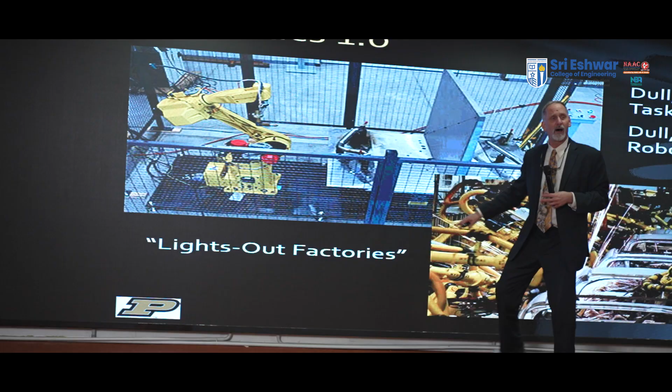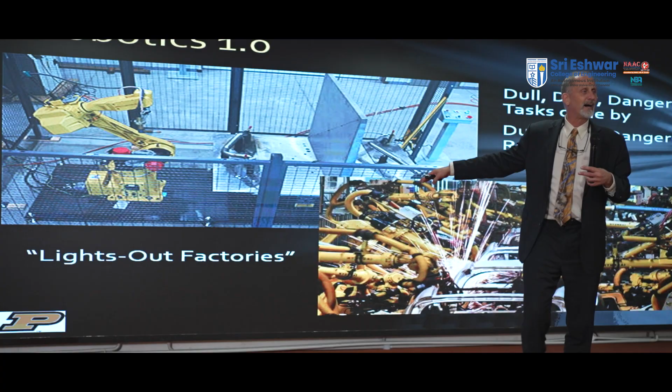My definition kind of captures really what robotics 1.0 was all about. Yeah, it has to do with these dull, dirty, dangerous tasks, unfortunately done by dull, dirty, and dangerous robots. But really, I think the problem with robotics in the 70s, the 80s, the 90s, and into the early 2000s was for a long time we talked about lights out factories. Well, how many humans are going to be in a dark factory?

But humans, right, if you compare ourselves to a bear or to a lion, or even an elephant, all those things have clear physical strengths. They either have big teeth or big claws or really thick skin, or they're just big, right? Humans, what do we have? We have no armor, okay? You don't have sharp teeth, you don't have claws. Exactly. Yeah, we think. We can solve problems, and we can solve problems in real time.

That's what, to achieve a lights out factory, you need. And everyone kind of forgot that. And that's why there's a problem. And this whole idea of robotics 2.0 is that we actually have to break from that history of thinking humans don't belong in the picture of manufacturing, for example, and certainly for other types of robotic uses like home health care, right? Or self-driving cars, where the cars interact more with other people and other drivers than they do with other robots. And so that's what we meant by robotics 1.0. Because, to be honest, we tried this for about 30 years, and it really didn't work very well.

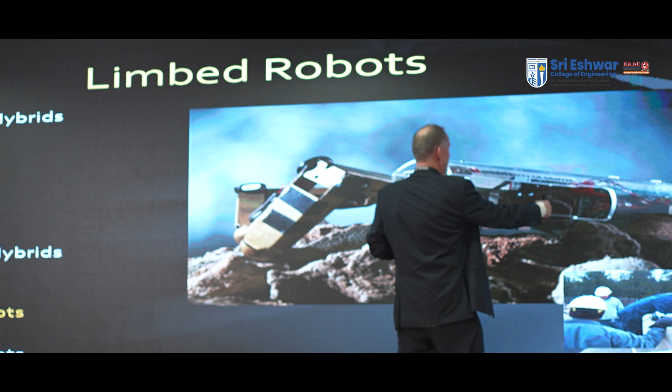My robot here, initially I said, well, I'm going to use that approach. It's a biped, but it's too energy expensive to actually have it stand up and balance itself and carry all that weight. So I said, well, I'm just going to make it drag itself on the ground. Okay? So the mass lays on the ground, and then the limbs actually just pull it along. Again, this is used for emergency response as well.

And so a quick video here. Hopefully, not starting. Oh, click on that. Video hasn't started, but that's okay. I'll skip over it. Let's click on that maybe. Just see it start up. No, that's okay. I'll go to the next one.

This is another form of limbed robot, but it's unconventional as well. So while supporting the body by the environment is conventional in biology, it's not so conventional in engineering design. And sorry I can't show it, but that's all right. And then of course snakes. I'm going to skip over the snakes. There's a whole body of research on snake locomotion because there's so many. Oh man, I can't show you these videos either.

This is a snake robot. This is a glass tube. It can actually crawl up the glass tube simply by pressing opposite parts of its body out against the tube, and then it kind of wiggles around. This is a version of a sidewinder. Unfortunately, this is a real interesting robot.

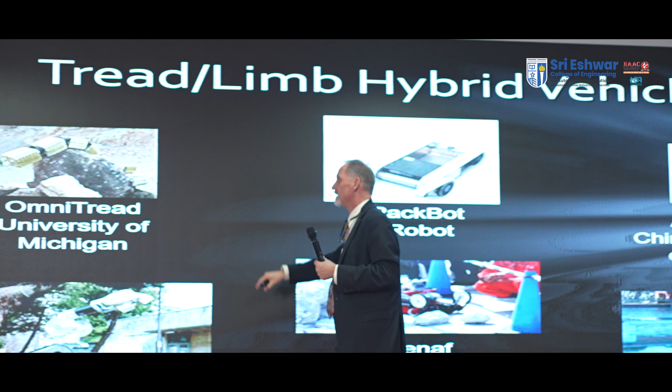This is an unconventional form because this robot has a skin that's actually toroidal. So the skin folds in on itself. And you can see that the skin is like a giant cylindrical tread. The whole skin is moving on the robot, folded inside, and it has an articulation to allow it to go through. And then see the skin pulling through. And we talked about this vehicle, which is a commercial version. This is another kind of hybrid of treads and limbs, and that's what the rest of these are.

But the unique features of these two, like that robot that snuck through the fence, these have full coverage of the treads. So you can see the treads move around here. They also move around here on all four sides. So if the robot falls over, it still has treads on the ground. Okay? Same is true of this one.

And then they have actuators in between that allow them to steer. So they can turn to the left, they can turn to the right, they can go upstairs, and different things like that. I already showed you this with toroidal drives, are very similar. This is something with a circular cross-section. So it looks like a sausage, but it's actually a robot.

And these two treads are actually full cylinders. But you need two of them to purposefully go anywhere. Okay, but the advantage of these treads is there's never a place where the robot can get stuck, where it doesn't have a foot on the ground, if you will, because the entire surface is covered with the treads.

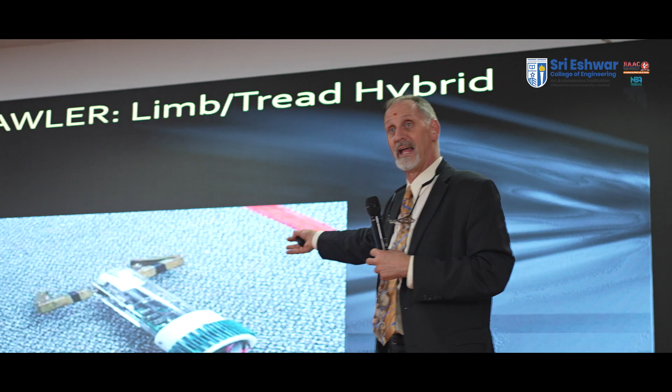And that's one thing that we were looking at from a mechanism standpoint: okay, how do you take the basic limbs of our crawling robot and then add a tread to give an unconventional form of what we call heterogeneous differential drive. So now, on one side, you've got limbs crawling around, and on the other side, you have a tread. Now we don't see those very often because, like wheels, we don't see treads in biology. But it turns out we do see a lot of heterogeneous drive structures in biology.

A grasshopper is an example, right? A grasshopper has some little tiny legs in the front and big giant legs in the back, right? And the big giant legs are for explosive locomotion. It can make huge jumps and escape a predator quickly. Whereas the small front legs allow it to crawl and eat things the size of its mouth, okay? Much smaller than a predator. And we see that a lot, these heterogeneous locomotion structures.

So I'm going to skip over this in the interest of time. But I am interested in that. I hope this one runs. In biology, we see those heterogeneous actuation structures.

Okay, so over time, we're seeing this complication exist, where we started with wheels. That was easy for engineers to build and design, but it doesn't work in the natural world. You need to build a road for it to work. So as soon as you get in the natural world, we start to have problems. So we added treads. That was a form of hybridization. You're carrying your road along with you. Can't get up the steps. By adding a simple limb to treads, now we can do things like climb up steps. And in fact, that robot can climb over obstacles like rocks, but also up steps, into holes, different things like that.

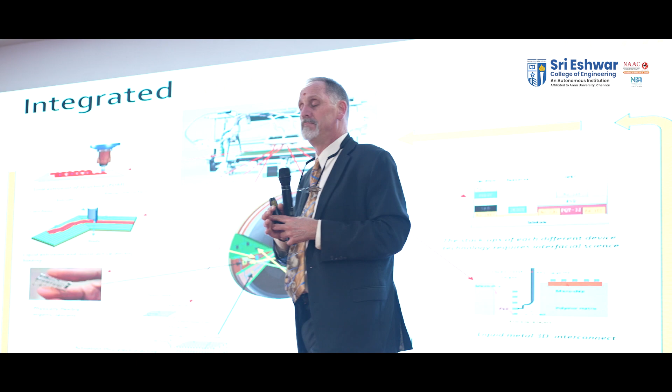So I'm going to say just one quick thing about how we fabricate these things, which now requires, because of this level of complexity, the design problems of adding hybridization, more and more complex combinations of actuation. I should also point out that the silos that we've developed in engineering, electrical engineering, mechanical engineering, computer science, computer engineering, are starting to merge.

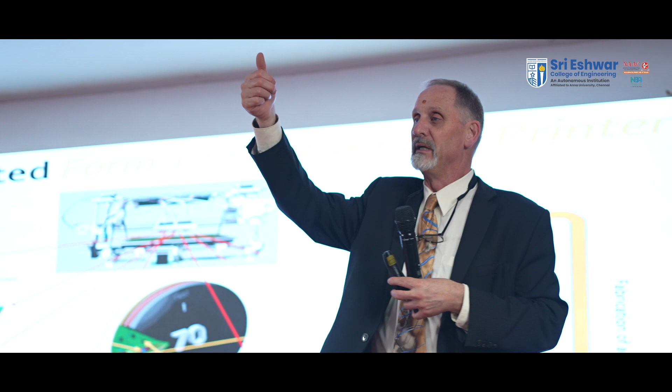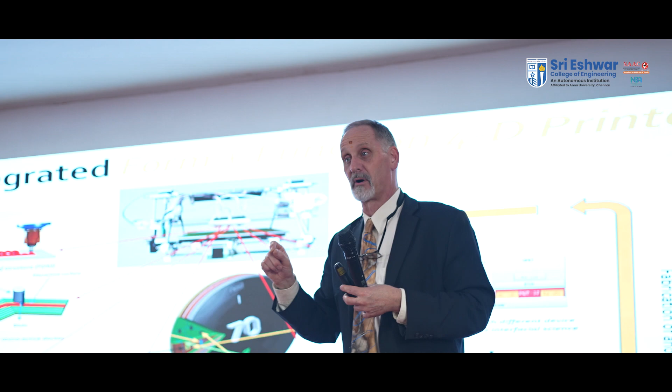With these increased levels of complexity, we need more sensors for these actuation mechanisms. We need mechanical design. We need electrical design. We need software and computer design, all simultaneously, but we still tend to do these things separately. And then we get communication problems. I'm interested in the area of co-design, where we're doing all these things simultaneously, but we don't have good ways of fabrication.

3D printing, I think, is a great way to abstract the complexities of fabrication so you can just press print. Nobody has to know how to use a lathe anymore, or a mill, or many of those complex machines for subtractive fabrication. Still need to know about materials, of course. But that doesn't help much with the computer, or the sensor, or the other elements of that design.

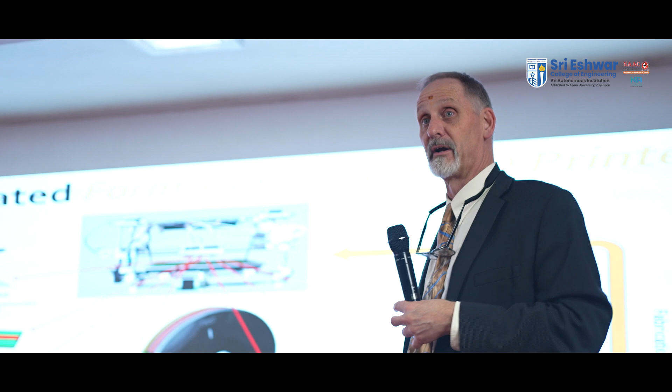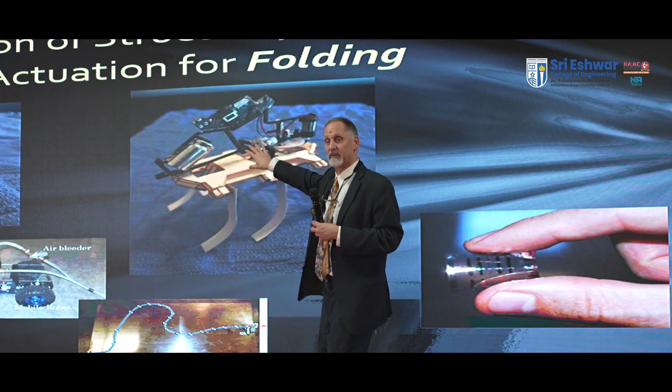And so what we're looking at is holistic fabrication of sensing, computation, and actuation simultaneously with form. Those functionalities combined with form, or typical CAD models, we call form plus function 4D printing. And so we've been developing this on a 2D plane. So these are folded robots. In this case, it doesn't have a printed actuator. It has printed sensors, printed computation, and printed structure.

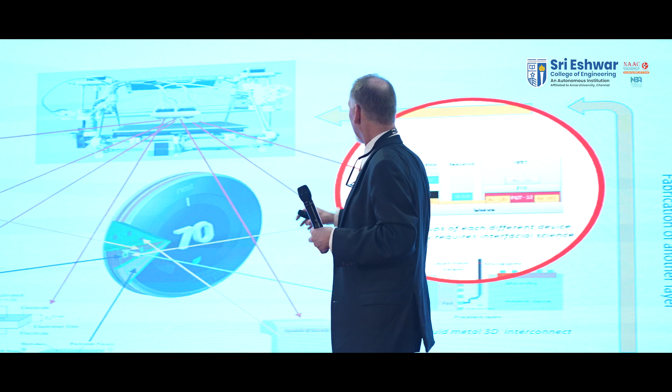But you might ask, well, wait a minute, where's the printed computing and the printed software coming in? That's one of the areas where we're really starting to put a lot of effort: polymer electronics and neuromorphic architectures. So basically, artificial neural networks can be printed on surfaces. It does the automatic planning of those with structure, so that you can add the sensors, computation, and actuators to the form and shape of the object that you're designing.